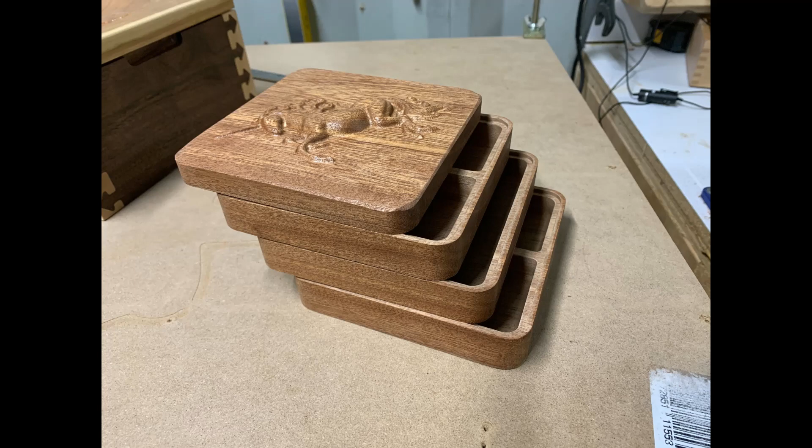Okay, today we're going to build a box, a stacking box. I've built these before, usually round, but this time I'm going to do it a little different. I'm going to make it square instead.

So we're in VCarve Pro, and we're going to create a new file. Using a 5 7/8 by 24-inch piece of wood. I measured the piece, it's 0.94 inches thick.

Working in inches, double-sided. Z0 off the material surface, that's my preference. You use whichever setting you like here, machine bed or 0 off the same side, whatever you like. I always use datum center. Being a welder by trade, we always measure center to center, and I've always worked center, so that's my preference. So you choose whichever you like.

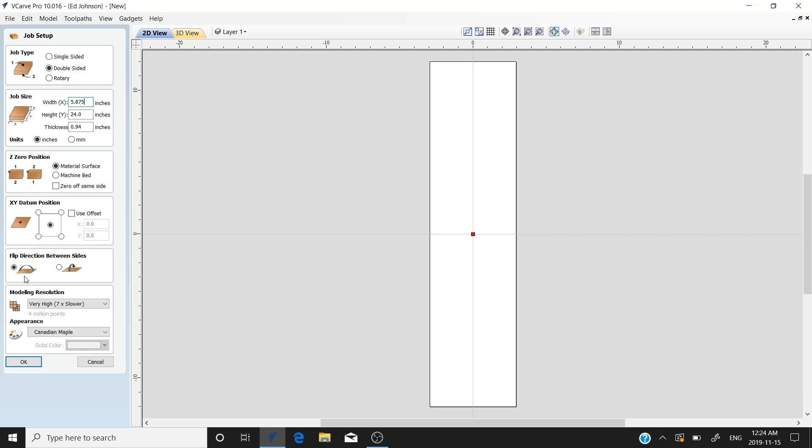Flip it horizontally. Now, the first thing we're going to need here is 4 squares because we're going to make 4 layers. We'll have the lid, the base, and 2 middle sections. So we're going to make these squares here.

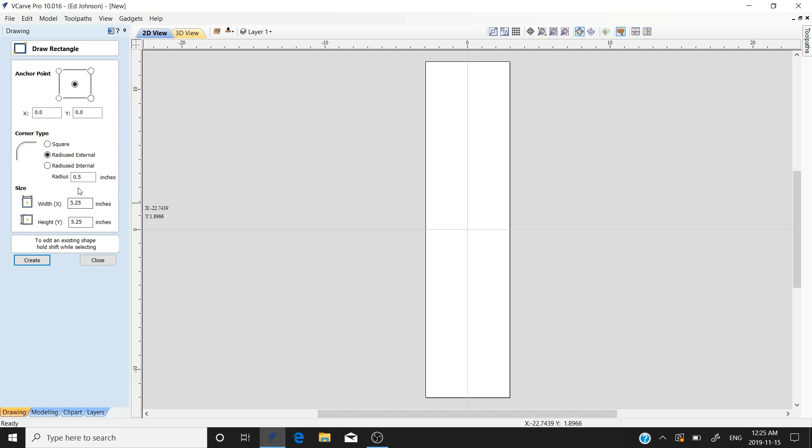5 1/4 with a radius, so 5 1/4 square with a radius. We'll create a square. Now we're going to move this up here so we have room for 4 pieces in total.

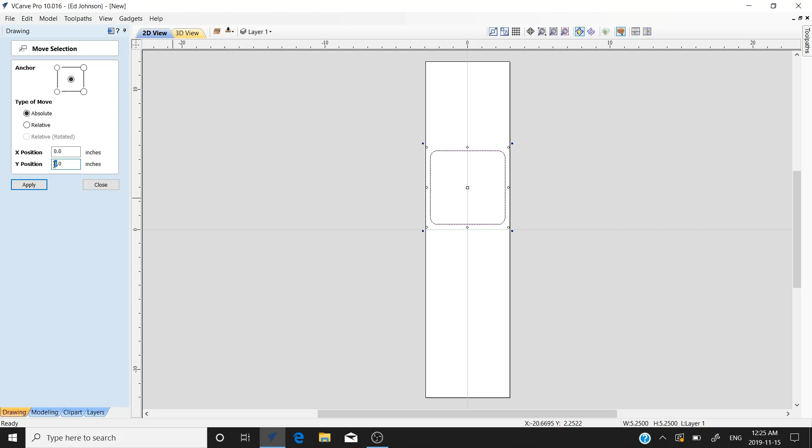So we're going to select our vector, go here to move selected objects, and we're going to put this at 3 inches. Apply. There you have it, just off center. We're going to copy, paste, and move this absolute to 9 inches. We're going to apply that.

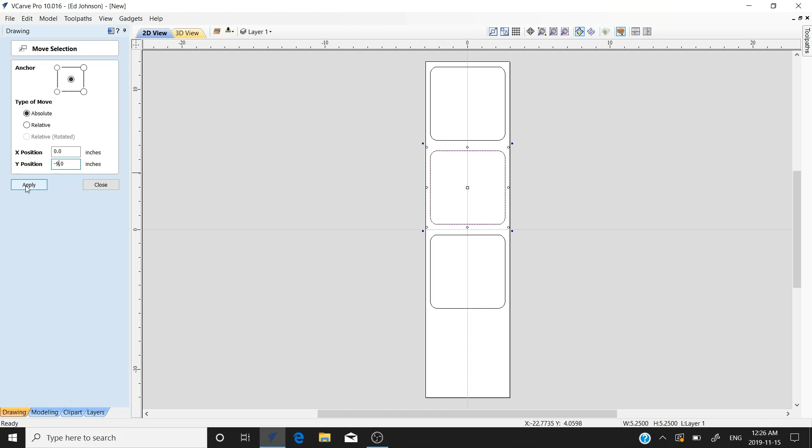Now we need 2 more down below, so we're going to paste again, absolute to -3, because we're going to go below center here. We're going to apply, and we got to have 1 more. We're going to do absolute to -9. Apply. We have our 4 vectors that we need.

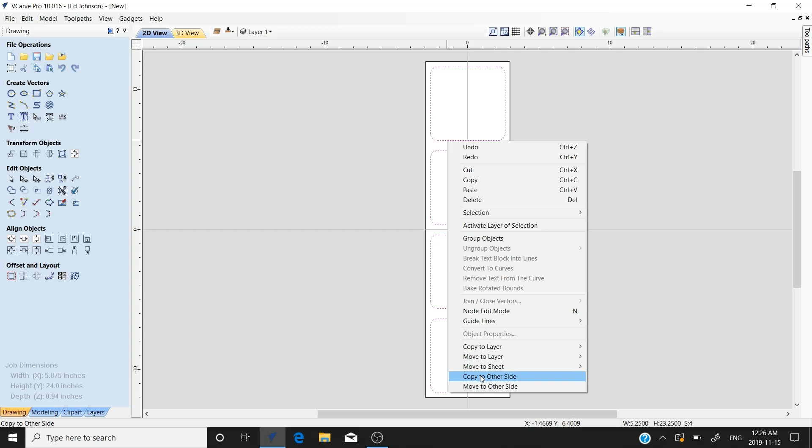We'll close that. Now we're going to select all of these. We're going to copy them to the bottom because we need to know where we're at when we go to do the other side, so we copy the other side, click that. Now when we flip it over, you can't tell the difference because they're identical so far.

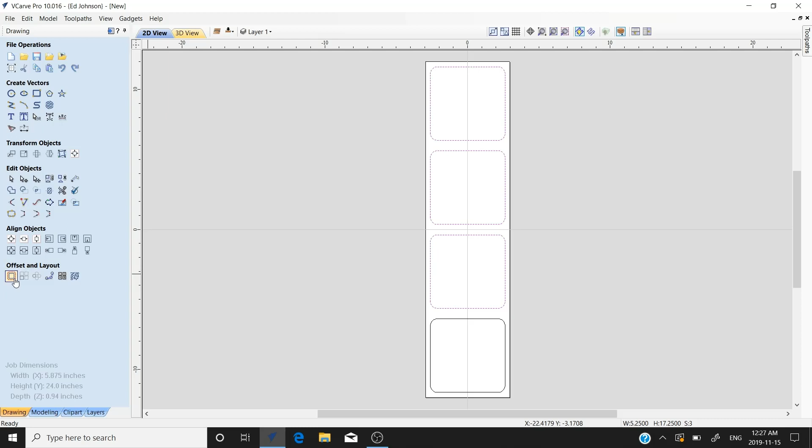So on the top, on these 3, select these 3. We're going to make walls 1/4 inch thick. So we're going to go down here to offset, and offset inwards 1/4 inch, 0.25. We're going to offset. There we have the walls of our box.

Now, to hold the top and bottom together, we're going to need grooves and recesses so they fit into each other. We'll put a 1/8 recess on the bottom, so we're going to put a lip here. We're going to offset it inward, but we're going to put it at 1/20, so it'll be tight, but it'll fit. The bottom will fit inside that.

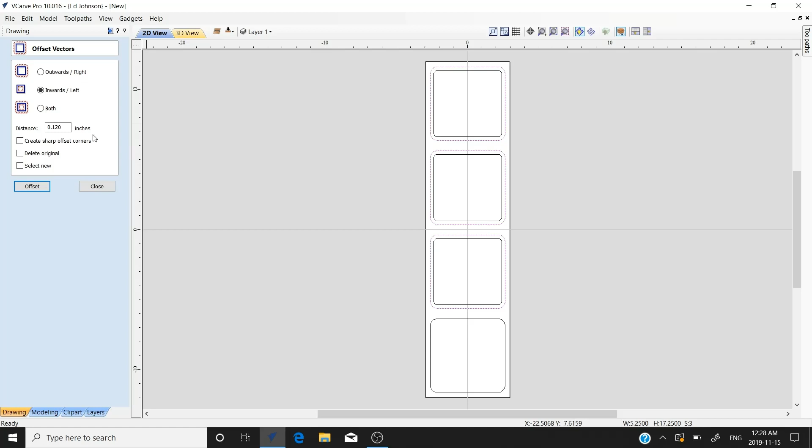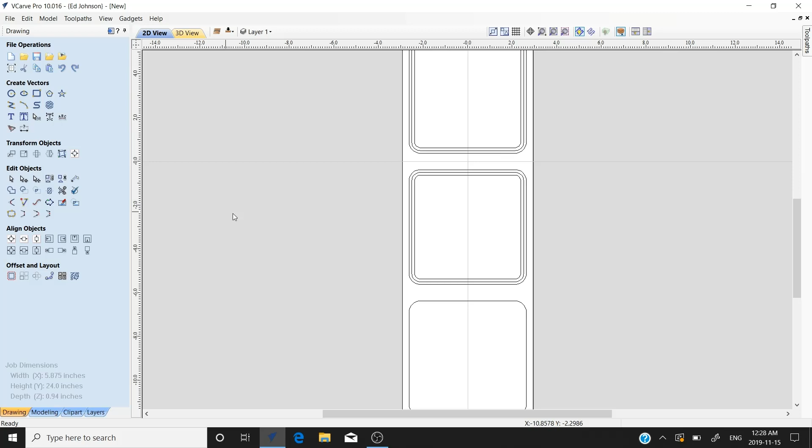So we'll offset that. Sorry, we got to select our vectors still. So we'll offset that, close that out. Now we'll leave one open. The second one, the first and second one, we're going to make little compartments, for, I assume, this will go to my grandkids or something, and they're going to like some small compartments for all their good little pieces of junk or whatever.

So on this one here, we'll make 4 compartments. Click there, and then spacebar to get out of there, and this will snap to center here. Click on there, go over to here, spacebar again, slide up a wee bit.

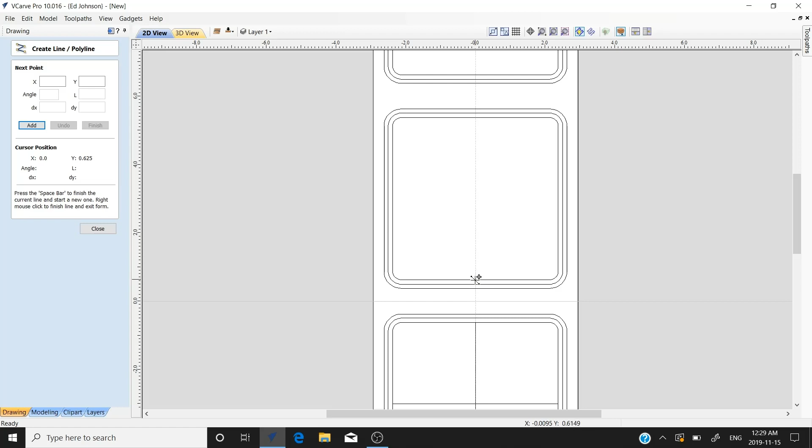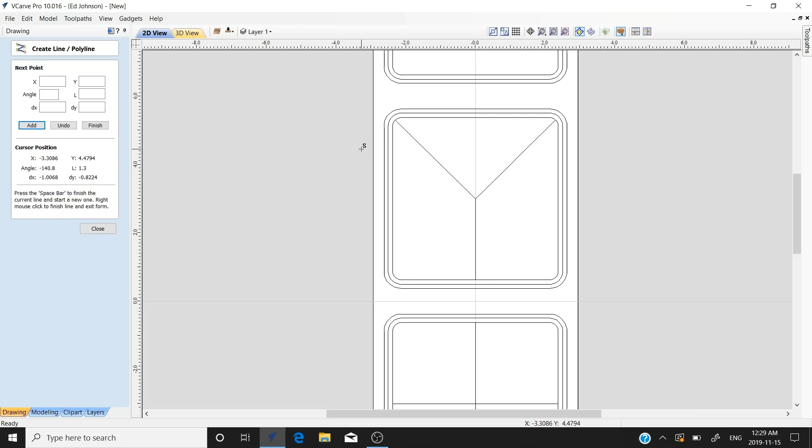Let's make 3 here. Here again, you can do whatever you like. We'll go halfway, click there, go over here, click here, spacebar again, start at the same center point, go over to the corner, and there we have 3 compartments. It's a little funky, kind of neat, different.

So we want to make these compartment dividers all 1/4 inch, the same as the outside edges, right? So we're going to close this. We will select these vectors, we'll also select these vectors. We're going to go into our offset, and this time we're going to offset both sides of our vectors. We'll go 1/8 of an inch, 0.125. We'll offset that.

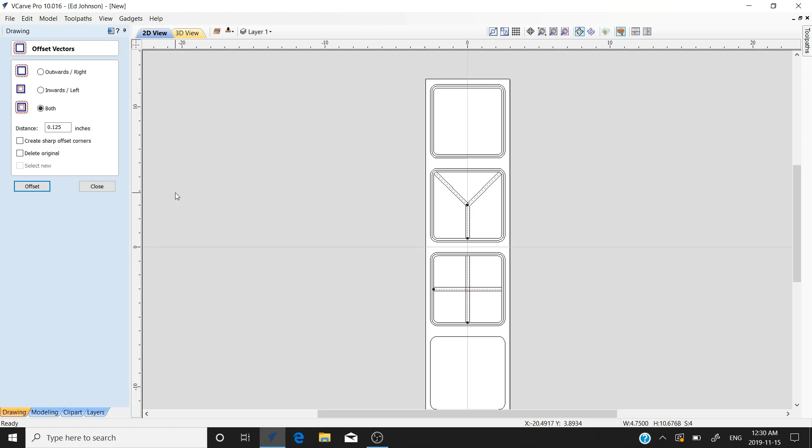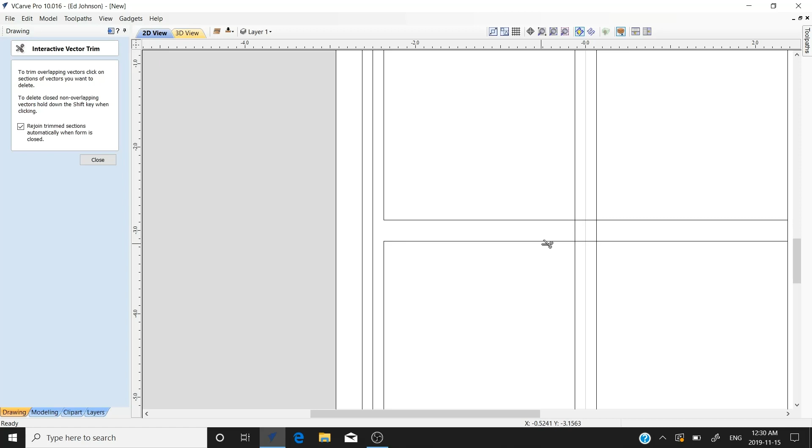And there you see we have 1/4 inch dividers in our little compartments in our box. With those still selected, we'll hit delete. Okay, we got rid of some of the vectors, but we're going to get rid of these other parts here of these vectors. We're going to use the interactive trim tool. We'll zoom in a little bit, and we'll snip it here, here, here, down here, up here.

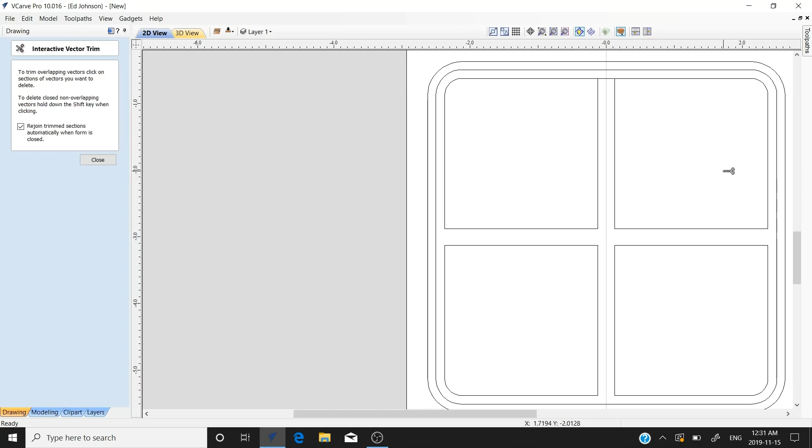Now, this is important because when we cut with this interactive trim tool, we were joining these vectors. So when we go to clear this out, we have one continuous vector for the toolpath to follow. Okay, now we'll go up above and do the same. Trim it here. We're going to get rid of these little tails here, because we got to join those vectors, right? This will get rid of them and join it all at the same time.

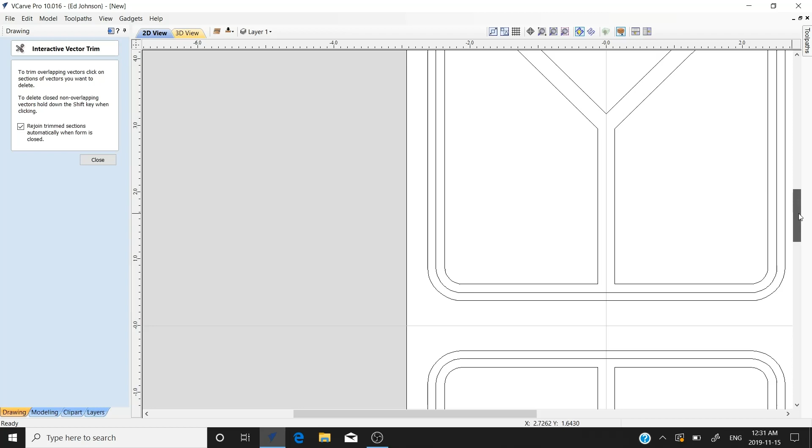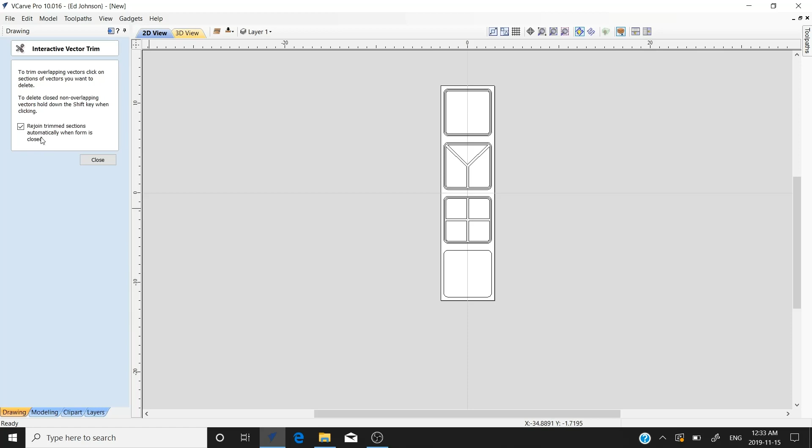Okay, we'll zoom in a little tighter here. Trim those little tails off, and then here, and this side as well. Okay, we have all our vectors for the top, but on the lid, we're going to add a little something here.

So we'll go into our clip art. I got a model here of a unicorn. I'm going to put that here in the center. So we'll just grab this little handle here in the corner, resize it a bit. You can go into the resizing tool if you like, whichever way you like. That's not bad. Our unicorn is selected.

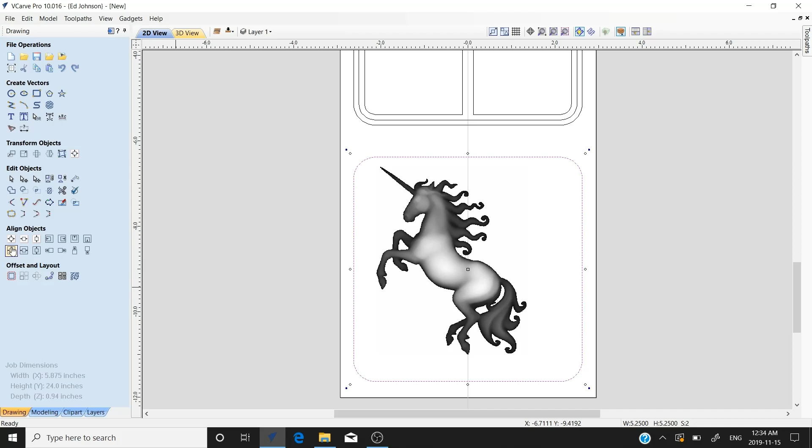Go back to the drawing tab. We're going to hold shift down and select the outer vector. We're going to go to this center object in selected object. So being as the outer vector was the last selected object, now our unicorn is centered into this, this is where we're going to cut out our lid.

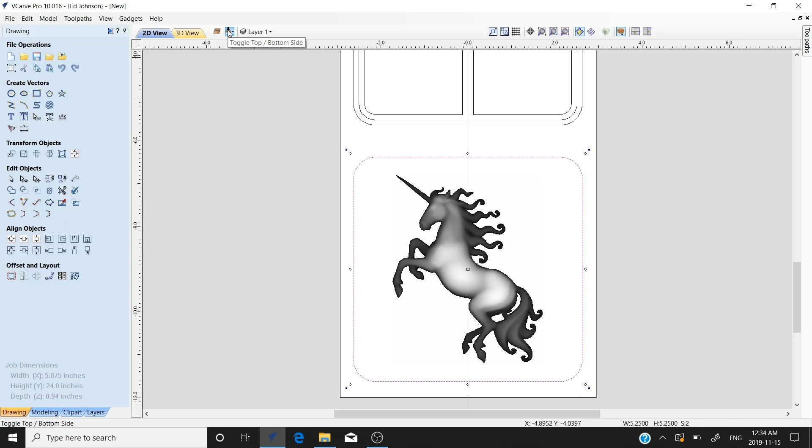So now we're ready to go to the bottom, go up here to our top bottom side, hit the F key to center this. Okay, now, not much to do on the bottom.

We're going to put our little recesses on this one and this one. We'll skip this one because this is the bottom. This will sit on the table, bench, or table, nightstand, whatever. And this one. So these three, we need the little lip for the fit into the inside of the top.

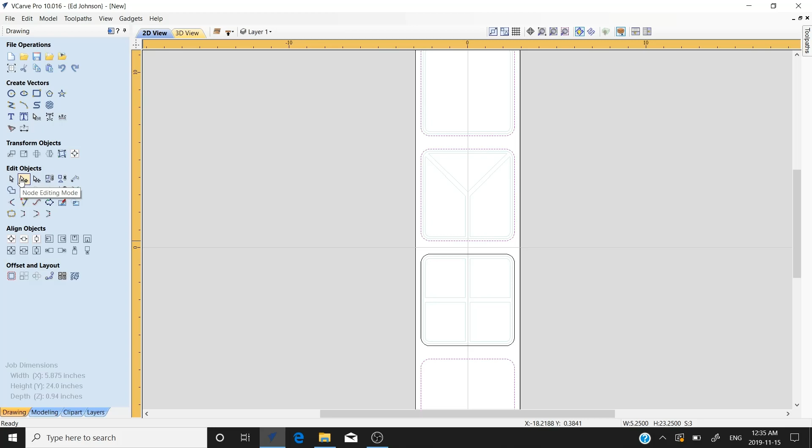We're going to offset inward. This time we're going to go the 1/8 of an inch. On the top we did the 120. This time we'll do 125. That'll give it a 10 thou clearance. It'll be tight, it'll be snug. So we'll offset that.

And that's pretty much done for that. On this one and this one, we're going to put just a little hollow in the bottom so it'll sit flat. And we're going to hollow this out a bit because it's going to be pretty solid, it don't need to be that heavy. So we're going to offset inward. Let's go 0.2. Let's go 0.3, that'll be fine.

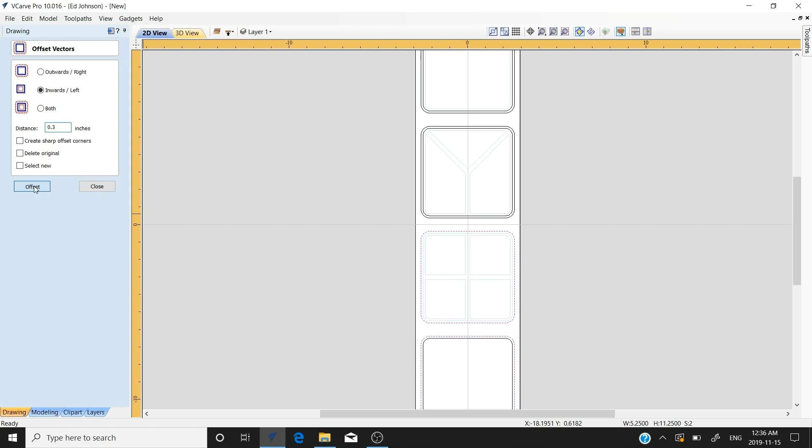Okay, now on this one, with the unicorn on top, we're going to close this. We're already done the drawing. All the vectors we need are here. Everything is ready. It's a quick, easy little project here.

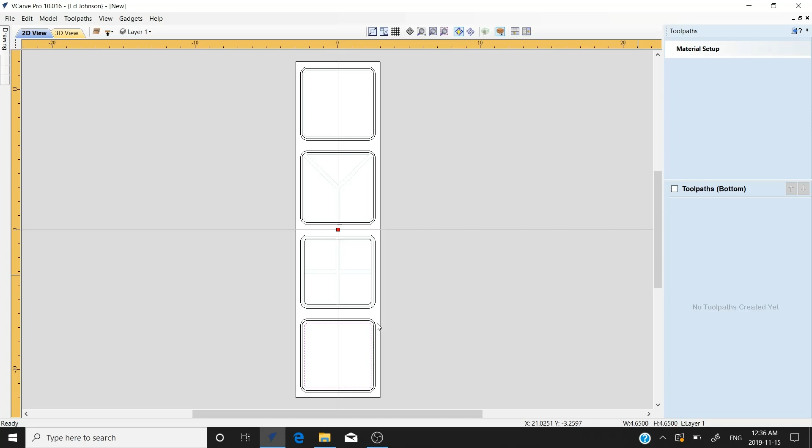We have 0.63 inches of wood under the unicorn on our lid. So we'll hollow that out 0.3. That'll leave us a 1/4 inch or better of material under our unicorn. We're going to hit OK.

Okay, so we'll pocket that out. We'll go 0.3 here, 0.3 deep, because that'll give us about a 1/4 inch. We're going to use a 1/4 inch ball nose to leave a rounded edge around the inside when we're done. We're going to use a 1/4 inch end mill for a clearance tool, and we'll calculate this out.

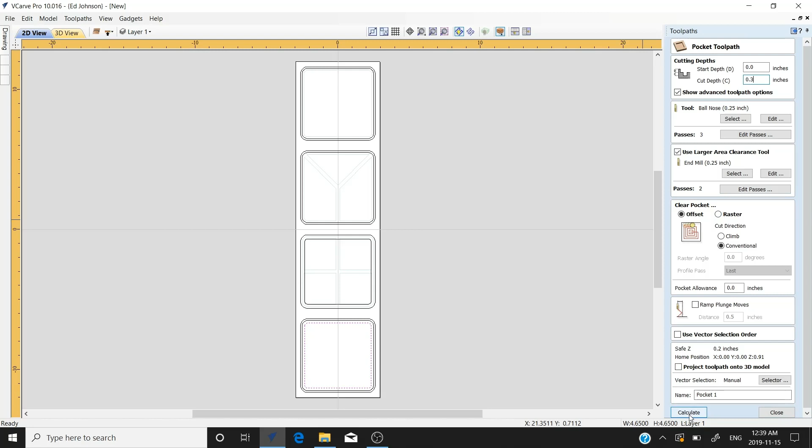And we're going to preview. Okay, that gives us a recess in there. It's just going to lighten up the piece a bit. Looks pretty good.

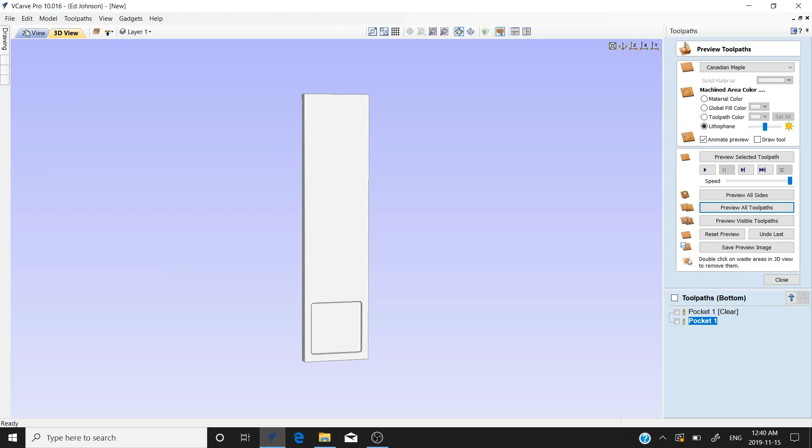Going to go back to our 2D. Now we're going to recess this the same way. Close this out. We'll pocket this out, we're just going to take a little bit, just so it'll sit flat on a table or nightstand or whatever. We'll go 0.05, 50 thou, just a little skim off of there. We'll calculate that out.

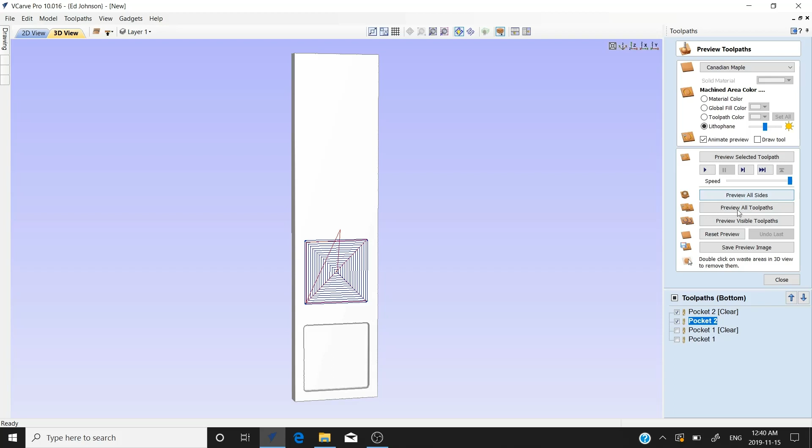Preview all Toolpaths. So now we have our deeper recess for our inside the lid, and a light, just a little recess here.

Now, one other tool to run on this side is to take off the outer edge to leave that little lip for the fit inside the pockets on the top side. So we're going to select the inner vector on these ones, and here, all these, not the inside one, the one at 125. We'll go in here.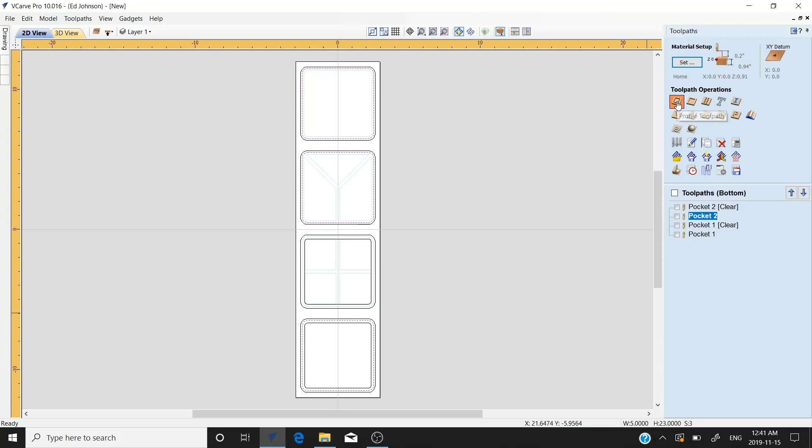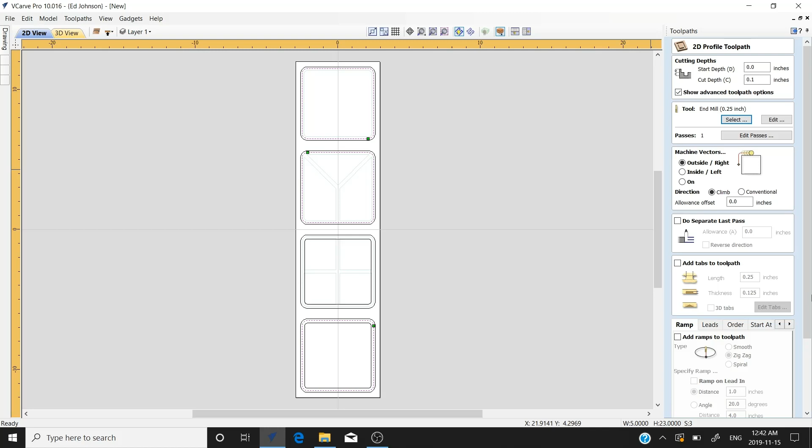We're going to profile toolpath this. Let's go 0.1... we'll use a 1/4 inch end mill, keep it the same as the other. So when we load our toolpaths onto the CNC, we can do all these in one step if we use the same tool. So we'll use a 1/4 inch end mill, outside, 0.1 depth, profile. Let's hit preview.

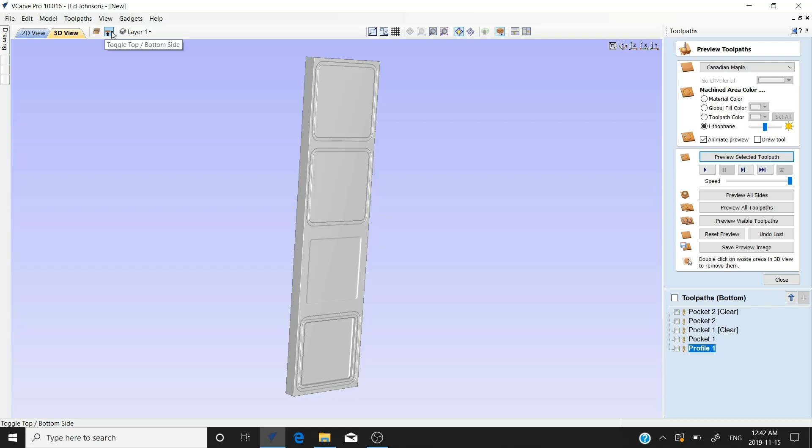Okay, so we have our little lip that'll fit into the recess on the lid. This is our little recess in the bottom, so it sits flat on a table. And here's the underside of the lid. We'll go back to the top now. And the bottom is complete.

Okay, now we're ready to toolpath the top side. So we'll select these vectors, hold the shift key down, select this vector. We're going to pocket these ones out at 0.75. We're going to use a 1/4 inch ball nose, that leaves a nice radius on the inside edge as we did on the other side.

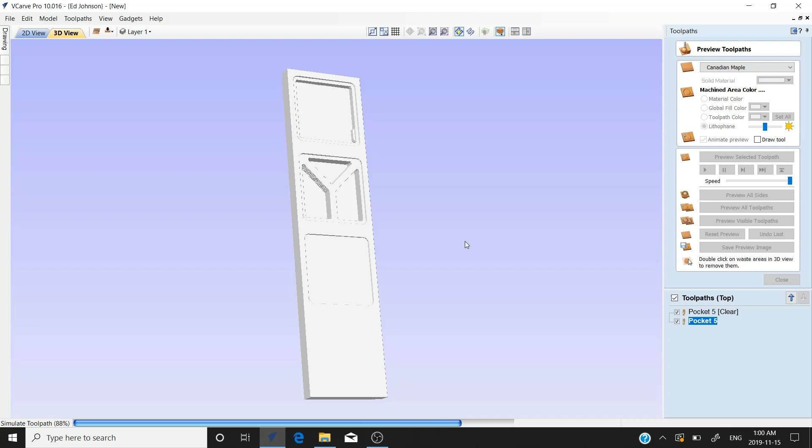Regular end mill, we'll pocket this out and we'll preview this. Okay, that's what we're looking for there. We'll zoom in a little bit. It's kind of hard to tell here, but it's a rounded corner in the bottom with the ball nose in there.

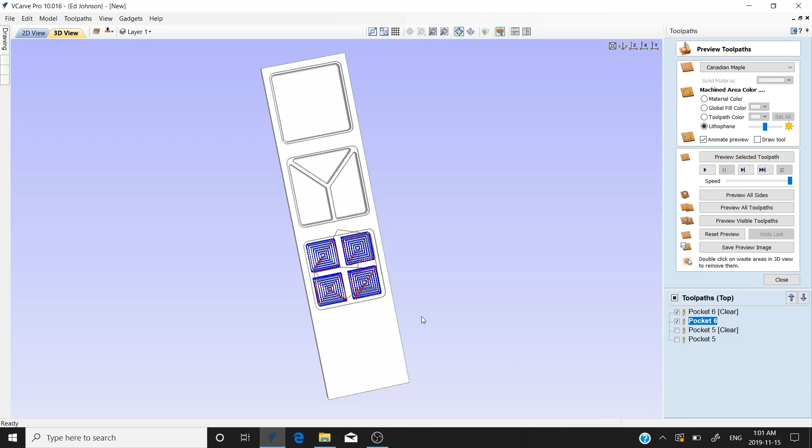Now we're ready to pocket this one out. Now this one, we're not going to pocket it out 3/4 of an inch like the other two, because if you remember, we put a little recess at the bottom of 50 thou. So we'll pocket this one out at 0.7, and it'll remain the same larger clearance tool. We're not doing any of the rest of this. We'll calculate this, preview that. Oh, we got to preview the clearance as well.

Okay, that gives us our little recess for the lip on the bottom and our little storage compartments and one larger compartment. Now let's toolpath our unicorn.

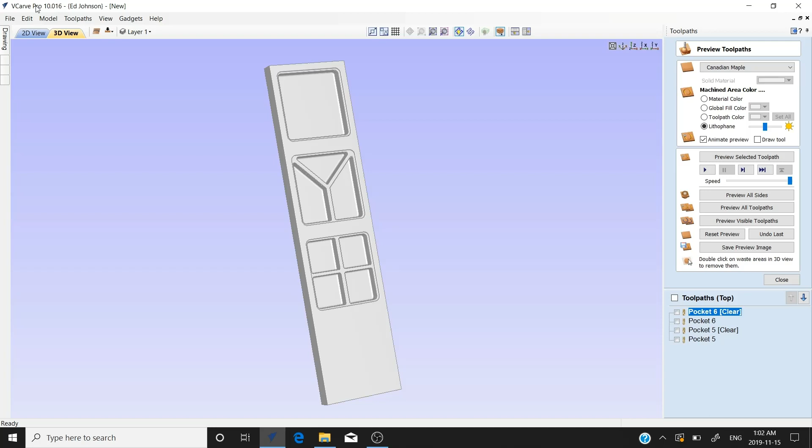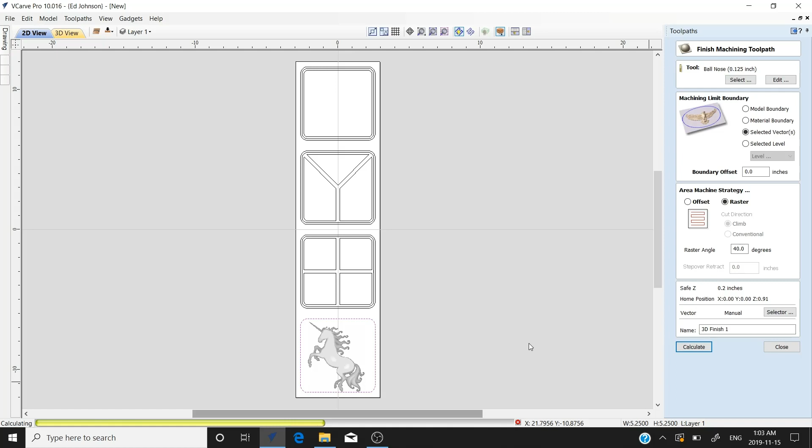Here we're going to select the vector around our model. We're going to go into our 3D finishing toolpath, and we're going to use selected vectors. This will machine to the vector. So we'll calculate this. Oh yes, we're using a 1/8 tapered ball nose, I forgot to mention that. We'll preview this. Oh sorry, I hit preview all sides.

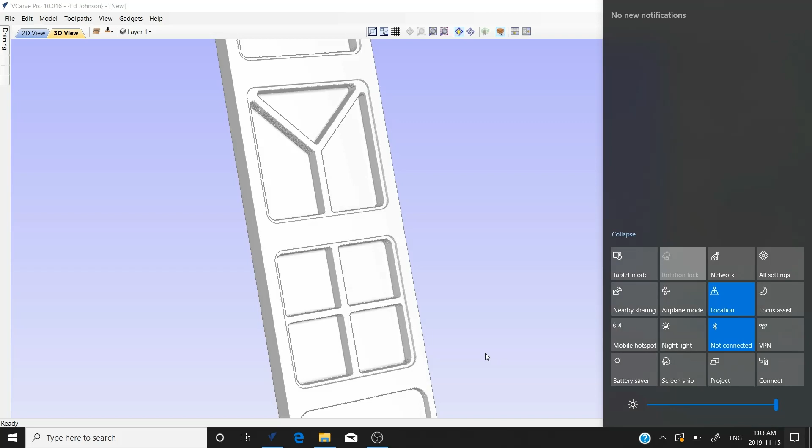It's going to go through the whole spiel here. Go to the bottom. And as you can see, it's machined out our unicorn and the flat surface right to the edge of our box lid. That's what we're looking for here. We'll center this again. We'll go 2D.

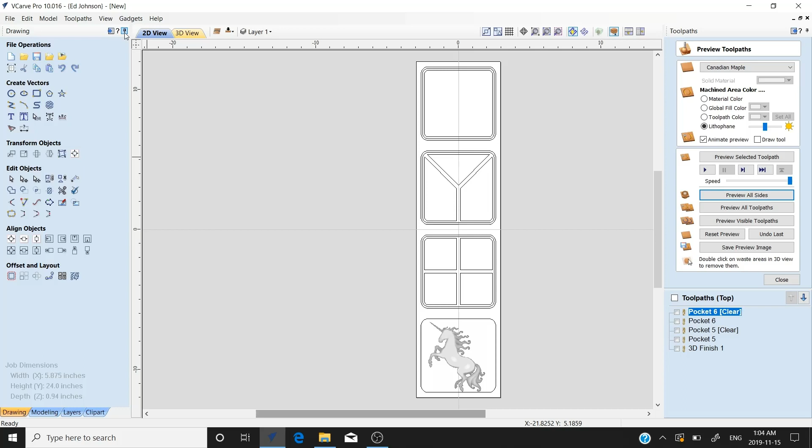Now, the only thing left on this whole project is to cut it all out. So we're going to select the outside vectors on all of these. Oops, I keep doing that. Close that, get rid of that. Hold the shift key down. Select the outer vector on all 4 pieces.

We're going to close this out, go to the profile toolpath. We're going to cut this to 0.94 inches, the thickness of our material. We're going to use a 1/8 compression end mill that does an excellent job, and it's an Amana end mill 1/8.

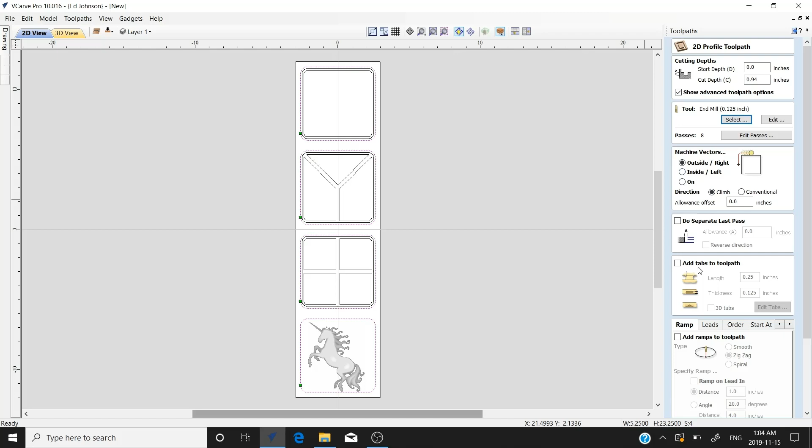Select. We're going to go outside. We're going to add some tabs here. You can have it select tabs for you, but I prefer to put them in myself. This way I know where they're going to be, and how I'm going to cut them out with a little handsaw, thin kerf. So I prefer to just do it manually. Just hover your cursor there and click it. Quick and easy.

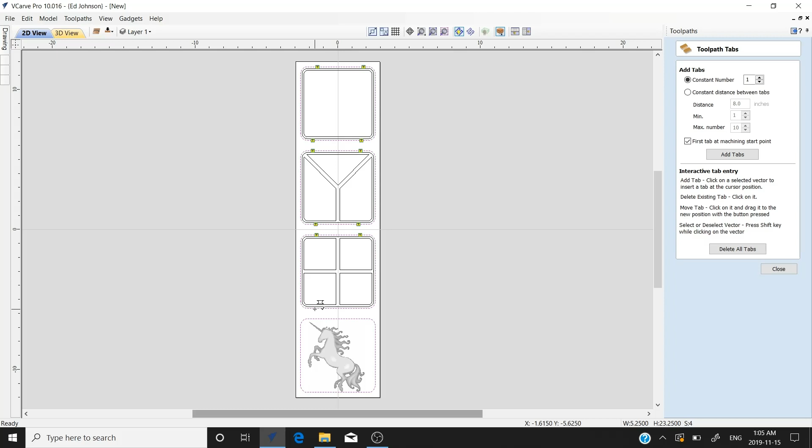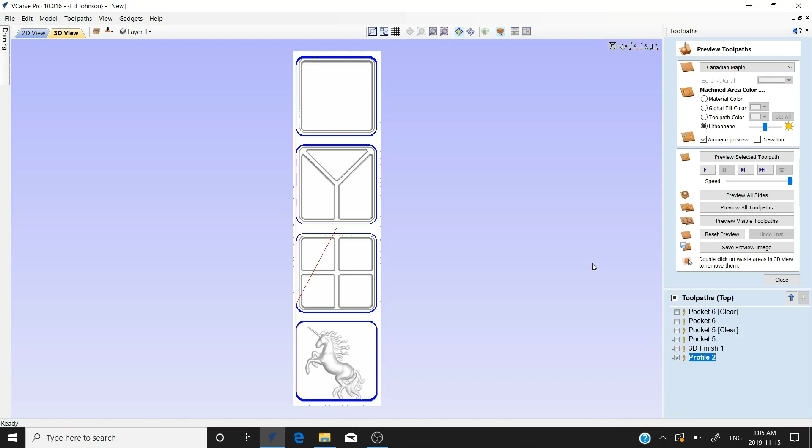And we're done that. Close this tab. We'll calculate, preview this. And there we have it.

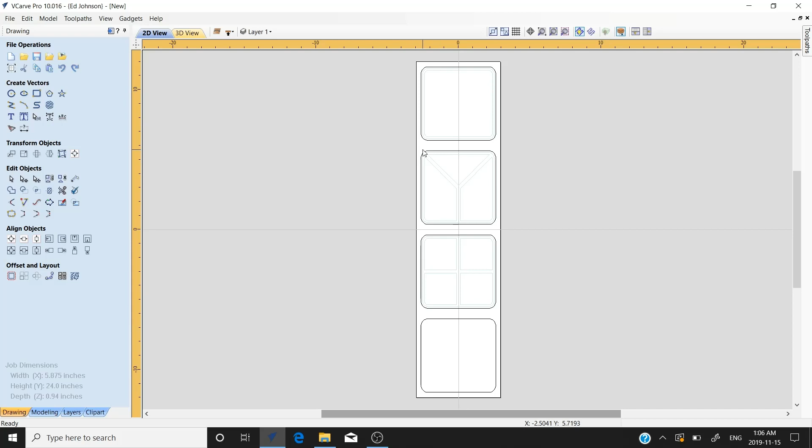Just one thing I forgot to do on the bottom. We're going to cut the bottom first, and then we're going to flip it over. We need to index this to our spoil board. So we're going to go back to drawing, 2D. We're going to put 4 circles here, and we'll pocket them out. We have 4 holes for dowel pins, 0.3 inches. It's a tight, I have 5/16 dowels, and those dowels are soft, so I put a 0.3, which is a tight 5/16.

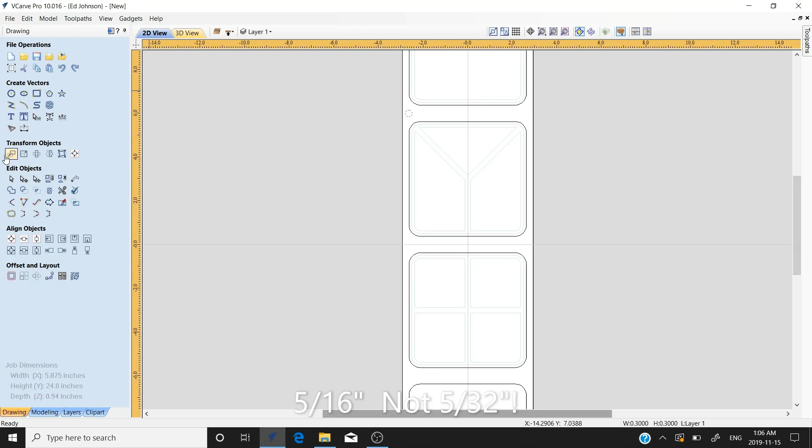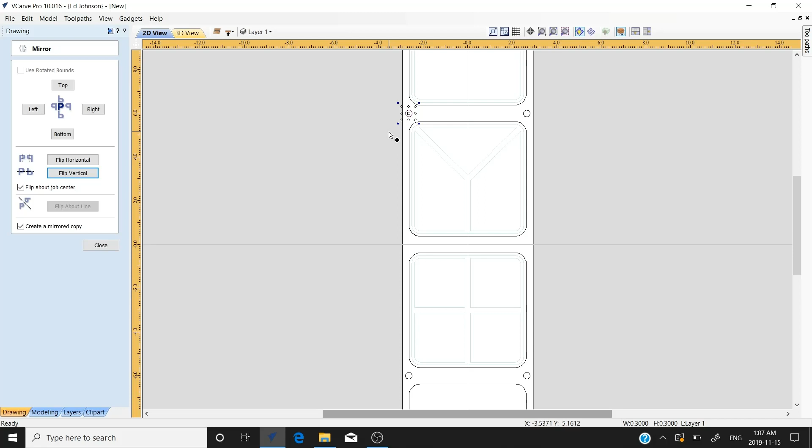And it'll hammer in there nice and tight. So we're going to go to mirror, these have to be symmetrical. So we're going to flip about job center, and we're creating a mirrored copy. So we're going to flip horizontal, flip vertical over center, bring down, flip it horizontal over center again. Now if we were to flip it vertical, it lands dead center on top of our first vector. We'll close this out, we don't need that second vector, double vector, so we'll Control Z, get rid of that. So you see it's a dotted line, that means it's a single vector. So we're going to select all 4 of these.

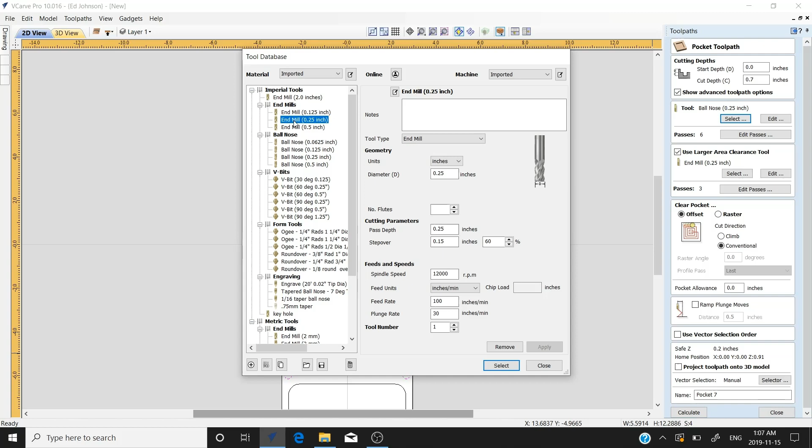We'll go back to our Toolpaths. Close this, we'll go to Pocket. Using the same 1/4 inch end mill, we will select our end mill, 1/4. Select that. We obviously don't need a clearance tool for that because it's the same tool anyway. We'll pocket these out to 1/2 inch.

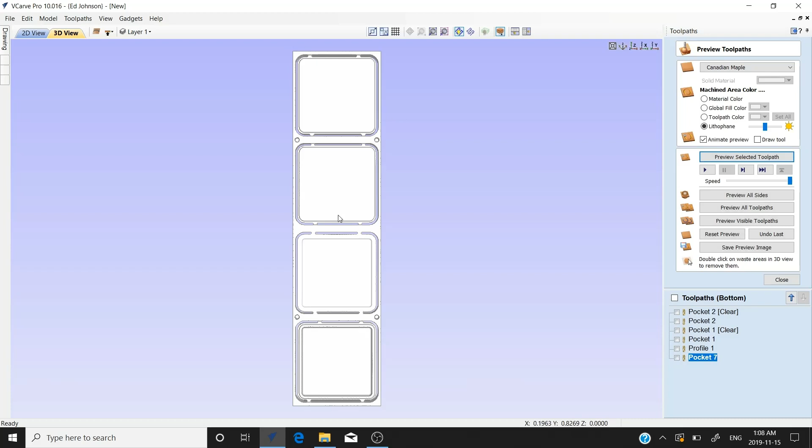Calculate that. Preview that. Okay, there we have our 4 dowel holes.

I've machined the bottom first. I'll put the dowel holes in. I'll rename this Align.

When I'm done machining the bottom, pull this piece off. Using the Align toolpath, I will drill the holes in the spoil board, reinstall this so we can do the top. And that's it.

We only have a 1/4 inch ball nose, 1/4 inch end mill, 1/8 ball nose tapered tool, and then the 1/8 I'm going to use to profile these. I could use the 1/4 to profile it, but I like using that 1/8. It leaves such a nice finish.

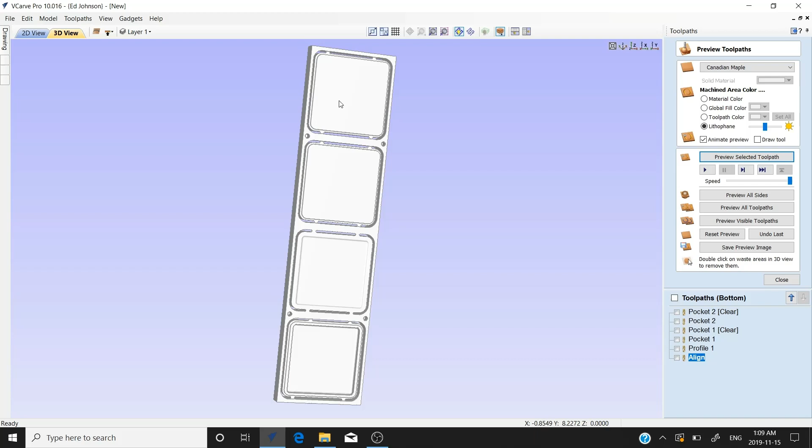So we have 4 tools for this complete project. And it's just that easy. We'll save these toolpaths, go down to the CNC and complete this little project today. It's only a few hours, just a short little job. And we'll see you down there.

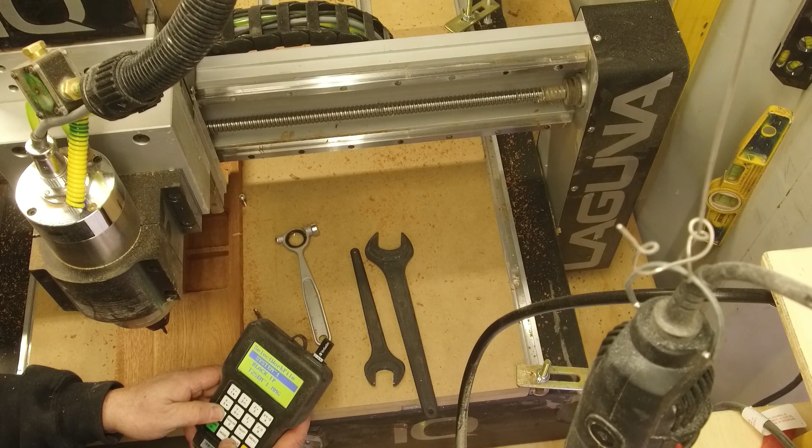Okay, now I'm going to start the tool path for the unicorn, the 3D finish pass. Get this started and back when it's done, and then we'll cut it out when the project is complete.

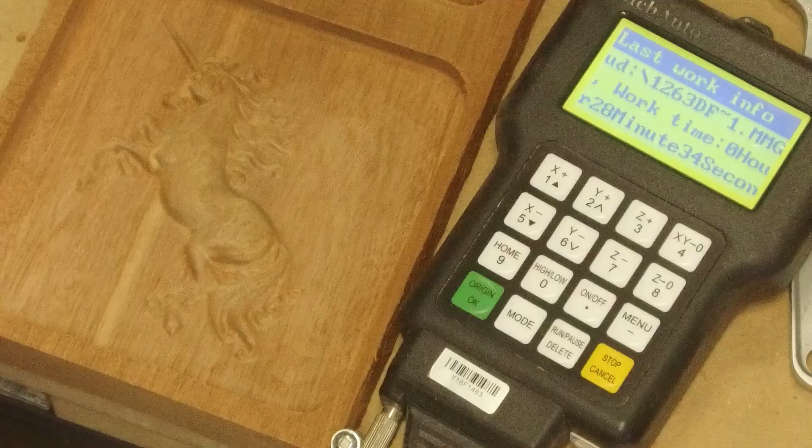Okay, at a total run time of 28 minutes and 34 seconds on a 5.5 inch square with a unicorn in it with a 1/8 end mill. That's pretty good finish, nice job.

And we're ready now. I'm going to put the 1/8 compression end mill in here, cut out these pieces, a little cleanup, not much. Pretty nice. Soften these edges a bit, and job is complete.

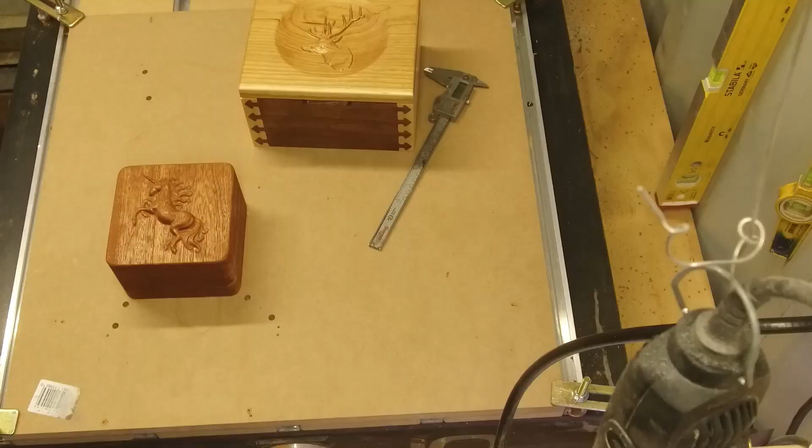Okay, so here's what we got. I just put a coat of shellac on to seal it up. It's not finished yet. It's actually a little tight, but it all fits together, stacks up.

The bottom with a little bit of a recess. So yeah, I'll finish cleaning it up, and a little shellac, maybe some poly, I don't know. But yeah, it come out pretty good. One 2-foot piece of wood, 1 inch thick, and you got a layered box, and I'm sure grandkids or children, whatever, anybody would appreciate that.

So the next project I'll do is joinery, something a little different here. All done with a 1/8 end mill. A little different on this side. Use 2 contrasting woods so it shows up. And it's very simple, pretty quick. This one I carved an elk head on.

Yeah, I put these little softeners here. It's a positive stop hinge, but I put this on just because those are so weak. So that'll probably be my next project.